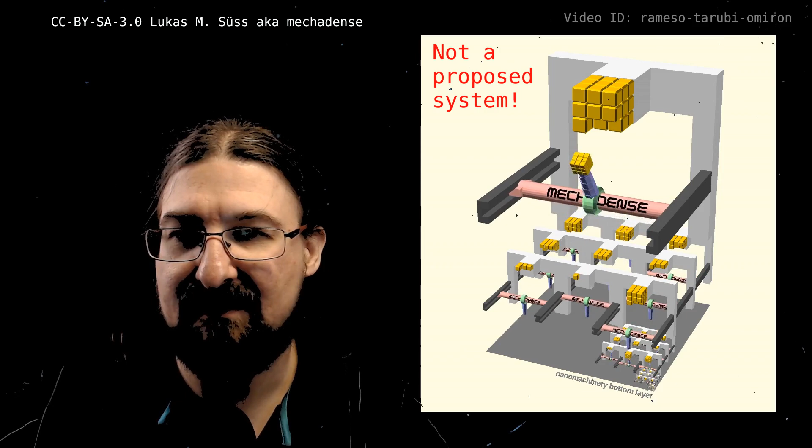Hello and welcome. I'm Lukas, and this is the start of a series about atomically precise manufacturing.

Preview. What I'll show you here is that when you make machinery smaller, it will get more productive, why that is, and what that means for macroscale style machinery at the nanoscale.

First, we need to talk about scaling laws. When we scale down macroscale style machinery to the nanoscale, we have to check in how far this hurts performance or even feasibility of this idea. But don't forget, it also could benefit performance of this idea. This is a possibility too.

Perhaps the most famous scaling law of them all is that finer material has higher surface area. When we go from 1 unit of length to 1/2 unit of length, we go from 1 unit of area to 1/4 unit of area times 8.

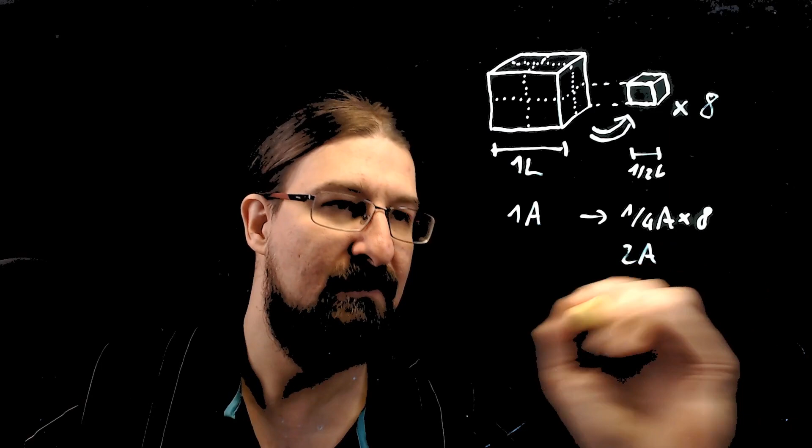As when we split the cube, we get 8 subcubes. And that means we get 2 times the area. That is, halving the size doubles the area. For 3 examples, this gives higher catalytic effect of finer powders, the adhesive effect of gecko feet, and the water repulsive effect of lotus leaves. But I won't talk about these because there's already plenty of resources out there about these effects.

Unfortunately, the scaling law that finer grained materials have higher surface area also means that smaller machinery has more internal bearing surface area per volume. That means higher waste heat. I will come back to that later.

There is a very special scaling law that's very much overlooked, and it's about what happens when you make machinery smaller. That is, when you make machinery smaller, you get, for the same total volume of machinery, more productivity. You get more product per time out of that volume. And that has very, very profound consequences.

So let's look at why that is. Why do we get more product out of the same volume when we make machinery smaller? So we see here we have a stack of machinery that successively gets smaller. We have a top production cell, next layer with small machinery, next layer with even smaller machinery, only part is shown, and so on and so forth.

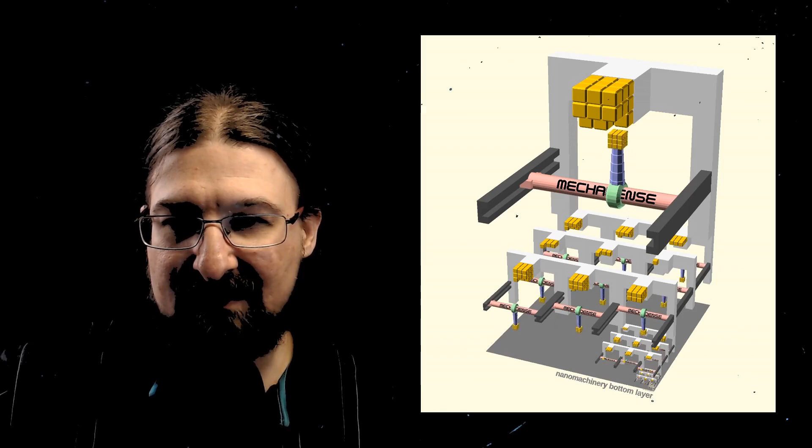As you can see, there's continuity, so there's no point in the whole stack where there needs to be temporary storage. So all that goes in from the lower layer goes out in the upper without any congestions. So the throughput at every layer is exactly the same.

But if you look closely, the layers get successively thinner. They get thinner and thinner, but they all have the same throughput. That means that even the thinnest lowermost layer has exactly the same throughput as the uppermost really big cell.

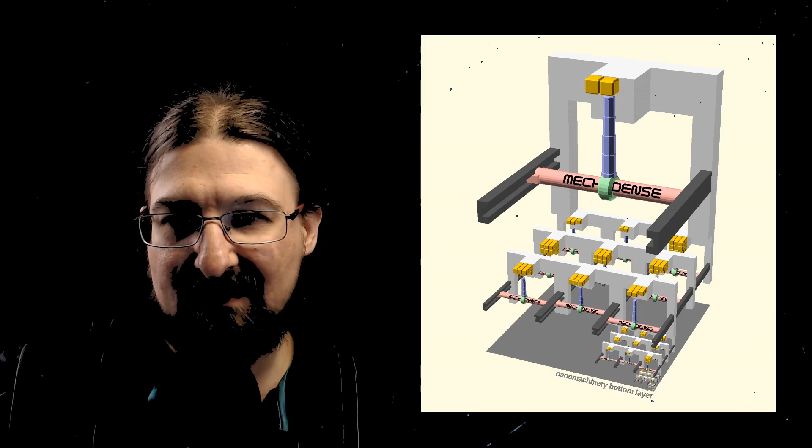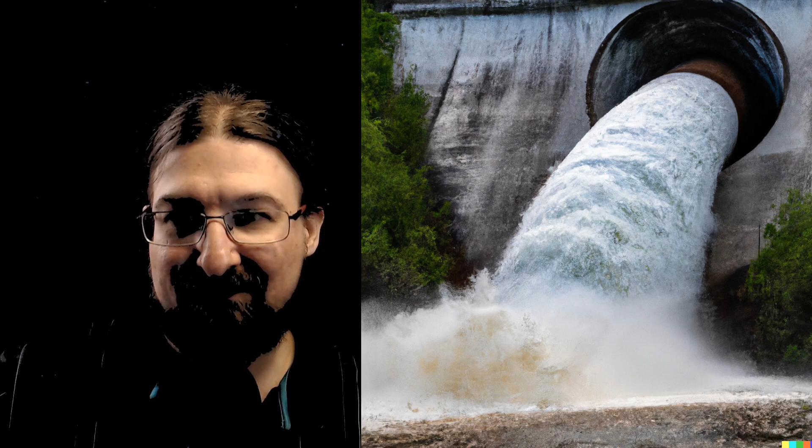And if you would fill the whole volume with the machinery of the lowermost layer, well, then you can imagine what happens. When I say filling up the whole volume with nanomachinery, then I mean this. The gray sheet alone would already provide very practical throughput, and filling up the whole volume...

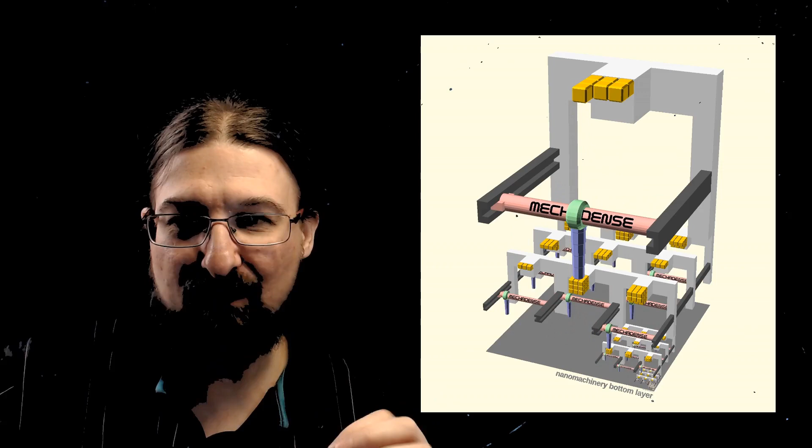Okay, there are some caveats to this. This scaling law only holds for the assembly. There's still the point that the product needs to be transported out of the system once it's finally assembled. And so you can exploit this scaling law only to some degree when the assembly motions are slower than your transport motions.

And that is the case if you have a more realistic system where not blocks are assembled with 3x3x3 size, but you assemble, say, blocks with 32x32x32, then the assembly motions are way slower than the transport motions, and you actually can exploit that scaling law quite a bit.

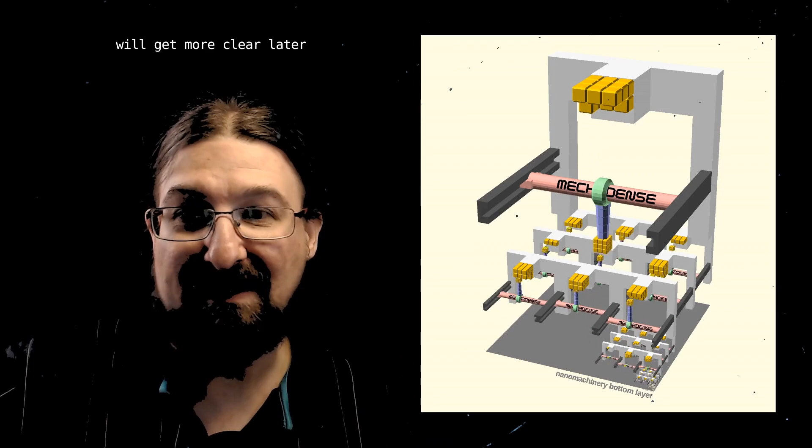Okay, technical detail. In a little more realistic system, where the layers have a stack of equally sized sublayers, blue, you also need transport channels for feeding in the input parts and feeding out the finally assembled parts, product parts.

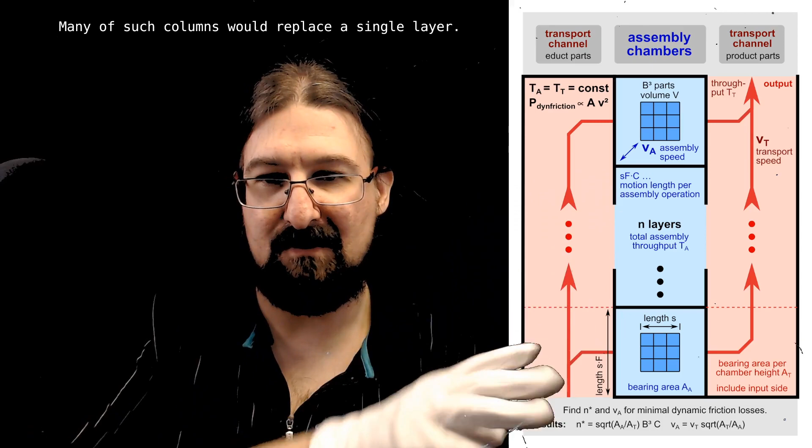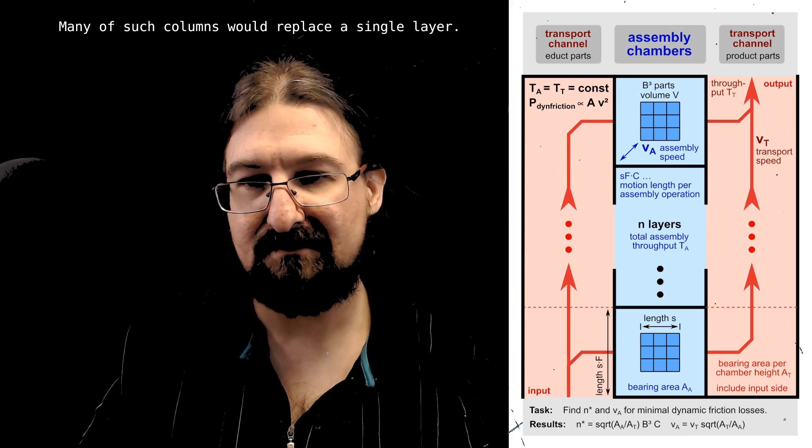Thus you have high transport speeds and slow assembly speeds. So you go one fast lane to many slow lanes to one fast lane. So you have the difference in transport motions and assembly motions.

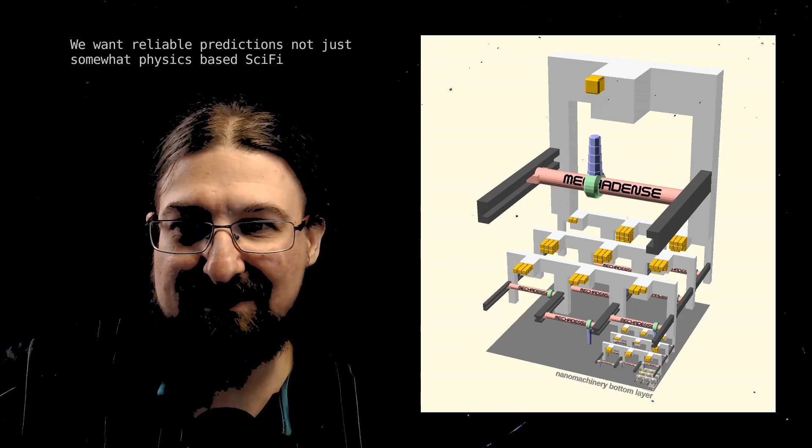So why does this matter? What is this relevant for? Do we really want to fill a huge volume of the smallest machinery? Well, that would lead to exorbitant productivity and exorbitant waste heat. We don't want that. A better approach is to turn it around and look at it the other way around.

So we have the huge advantage that for practical levels of productivity, we only need a very, very, very thin layer of nanomachinery. And in that very thin layer, there is only a reasonable amount of bearing surface area that causes friction. And also this thin layer is very easy to cool.

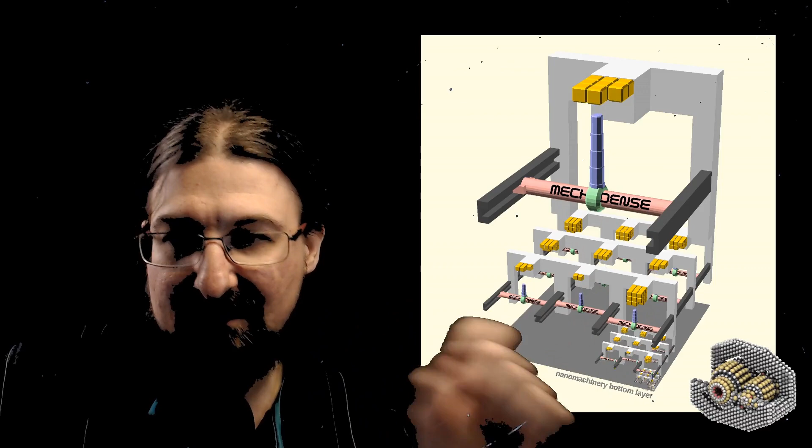As I already mentioned, smaller things have higher surface area. This also holds for the nanoscale machinery at the lowermost layer here. But since we only have a very, very thin layer, there's very little volume. So the little volume with the lots of surface area per volume compensates, and we have reasonable levels of friction.

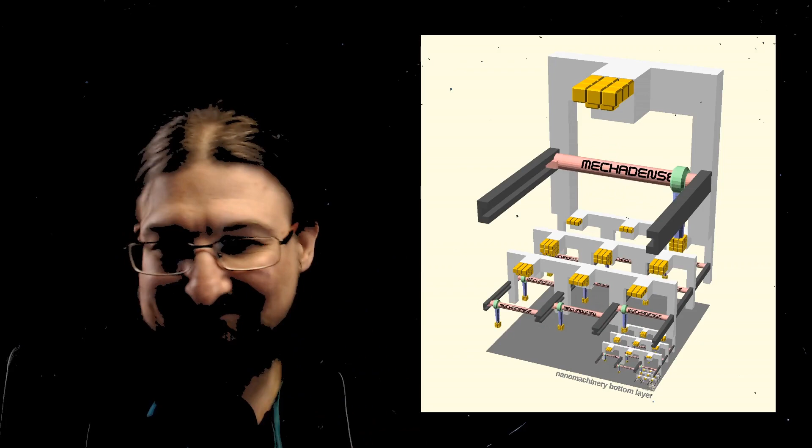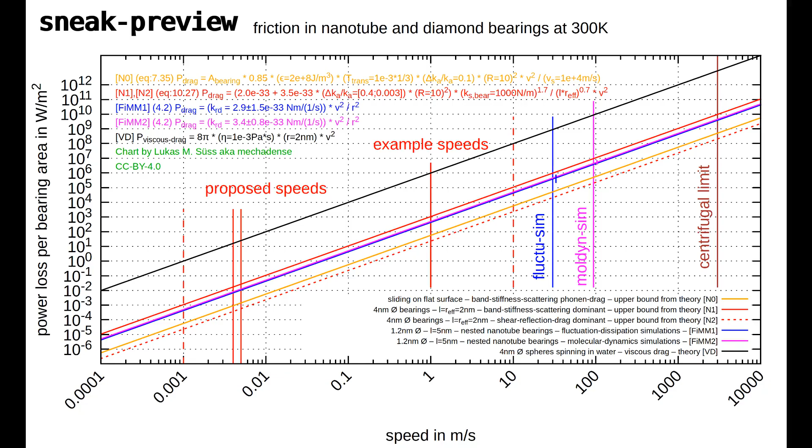If you want to know about quantitative numbers for friction, I took a look, and so far it looks good. I will eventually go into more detail in future videos. Regarding macroscale style machinery at the nanoscale, this scaling law debunks the argument that this won't work because of exorbitant friction. There are a lot of other arguments that I still need to cover.

One thing I want to make very, very clear is that this concept here is not a proposed system. Absolutely not a proposed system. This is just for the sake of illustrating this scaling law. An actual system would exploit that scaling law, and there are a lot of details to this, which I'll omit here.

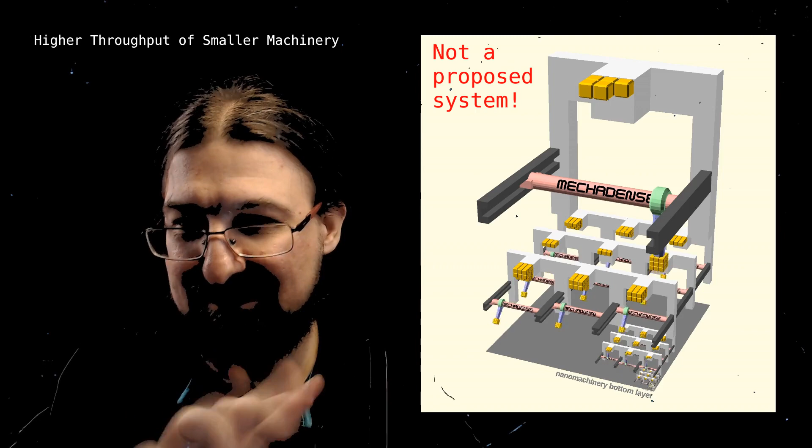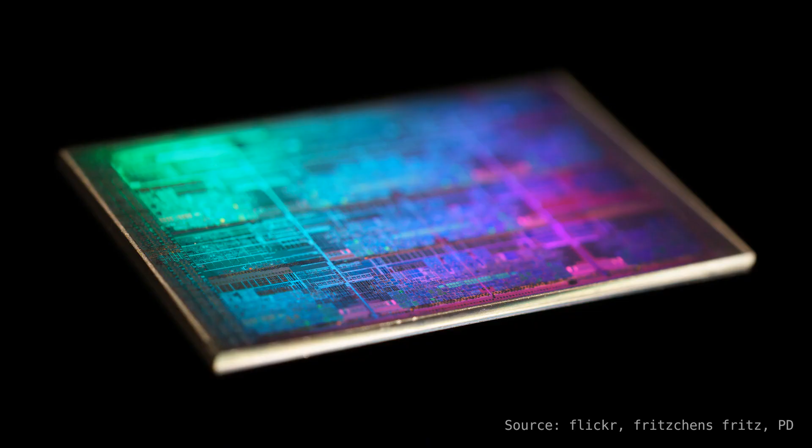The scaling law is also the reason why we don't want a soup of free-floating molecular assemblers, but instead a very thin layer of nanomachinery fixed onto a chip, just like outlined in the book Nanosystems. When it comes to an actually proposed system, there are quite some differences.

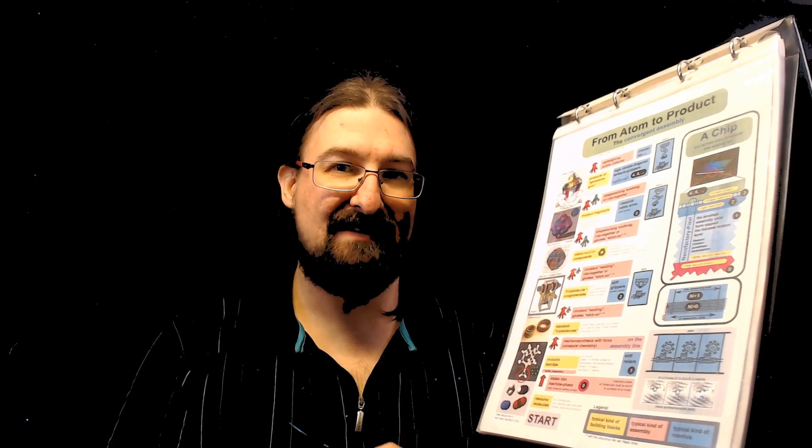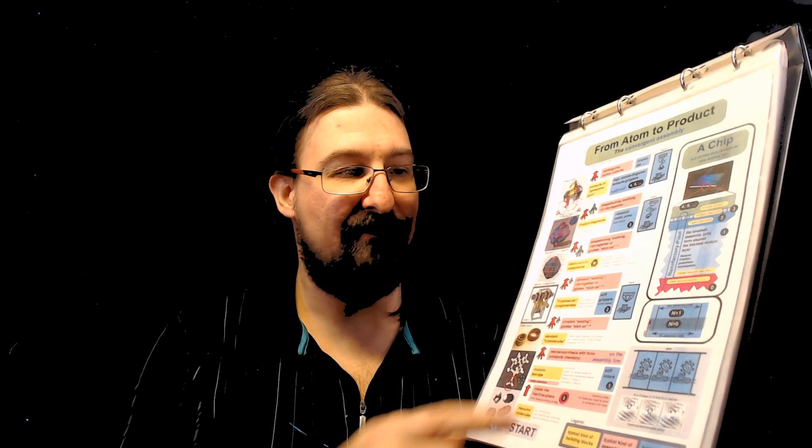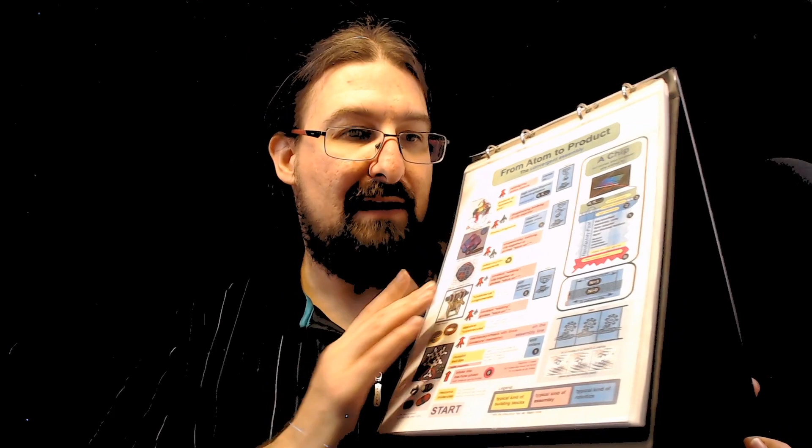Instead of having just single layers, we have layers with stack sizes of different thicknesses. We have robotics vastly differing in character across scales here in blue. We have different connection mechanisms across scales and different nature of part types across different scales in yellow. I may cover all of this in future videos in more detail.

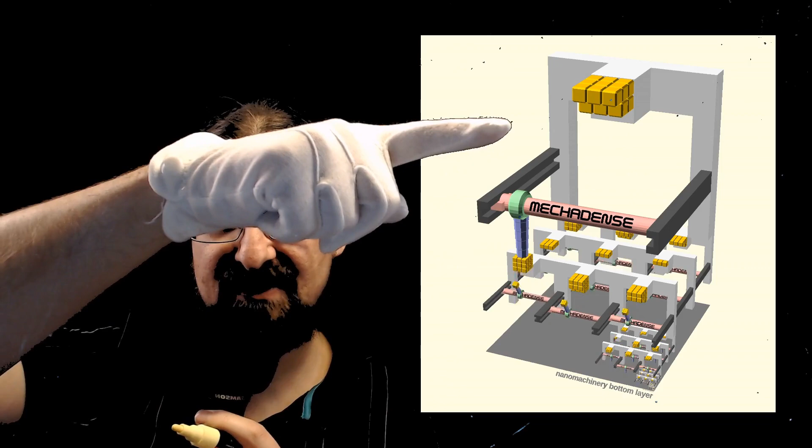Let's briefly look at the math of the problem. When we go from the uppermost layer, which is here just a single cell, to the lower layers, next layer here, then we might be inclined to think that the speed increases, that these smaller robots move faster than the big one here. But that is actually not true. Actually, these move at exactly the same speed as this one here. Exactly the same distance per time.

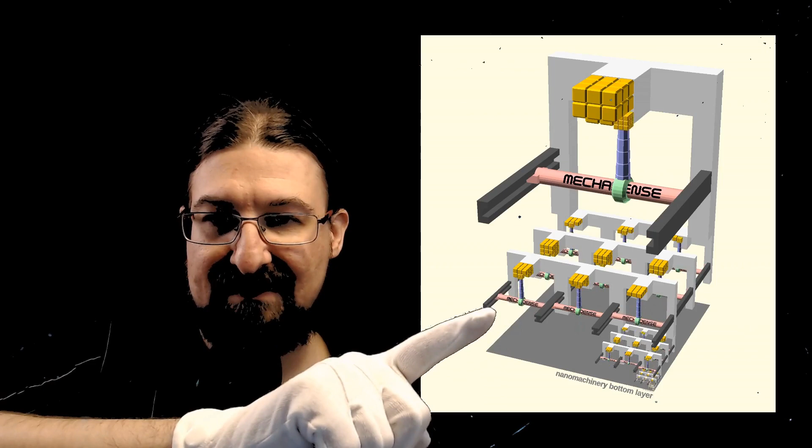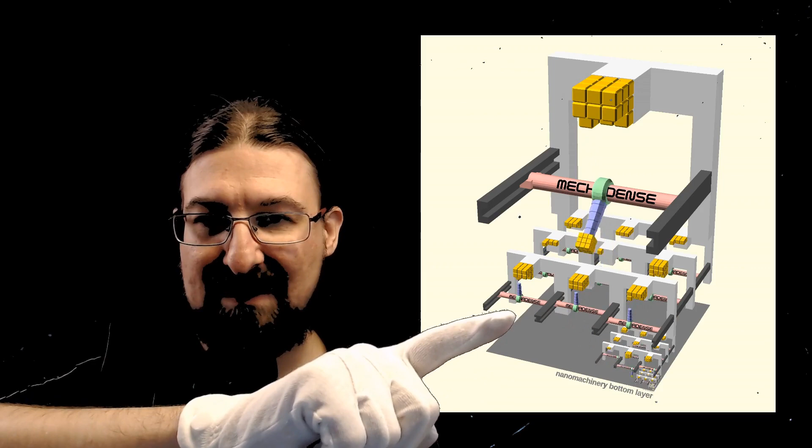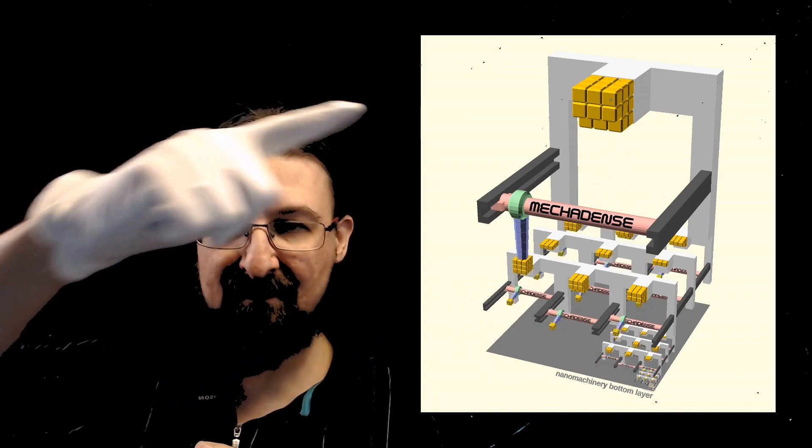What's different here is that the length needed to travel is just 1/3. So with the same speed, there are 3 times as many assembly operations per time. Thus, we have 3 times the frequency. So we go from upper layer 1 unit of frequency to next layer down 3 units of frequency. So we go from, say, F to 3 times F.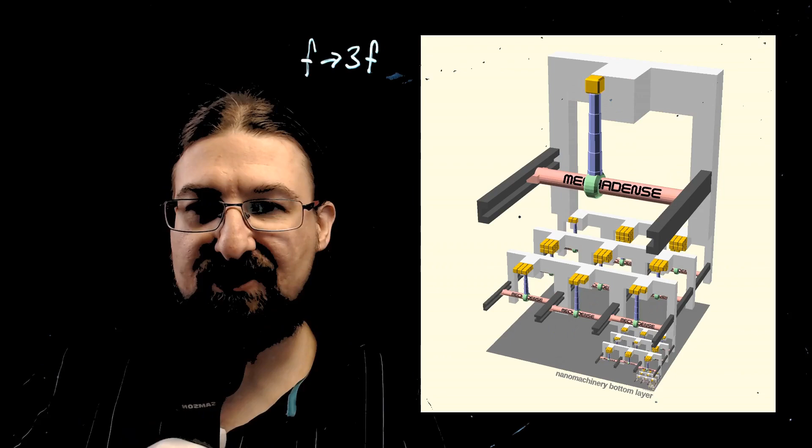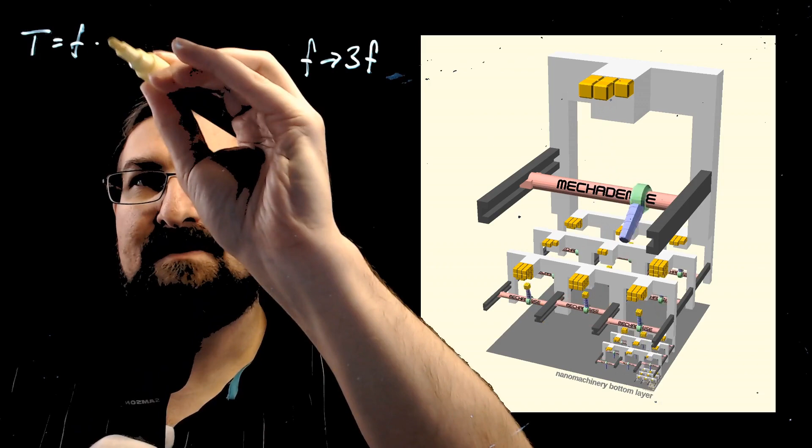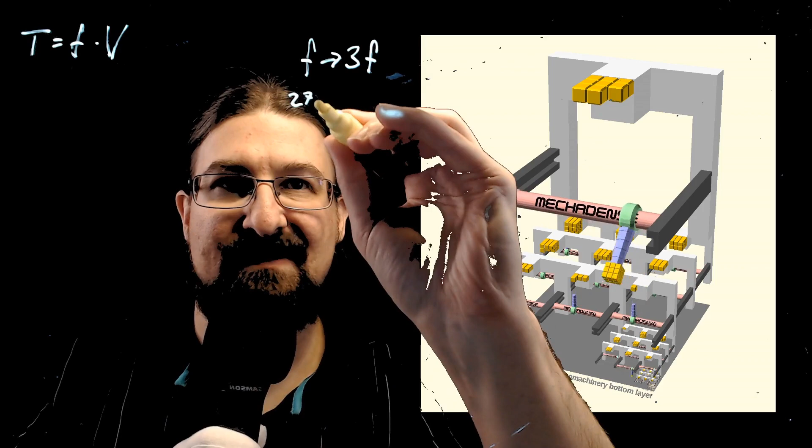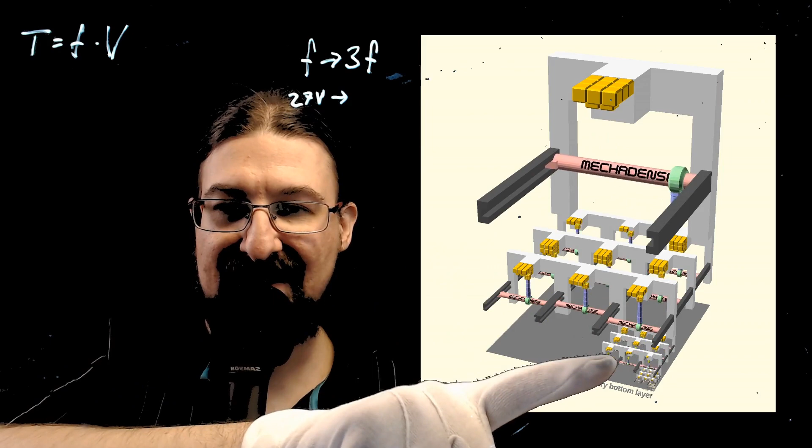So we want to show continuity of throughput, and throughput is equal to the frequency of operations times the volume that is placed per operation. So what happens with the volume? When we look here, what's placed are 3 times 3 times 3 blocks eventually. So we go from 27 times volume to, let's look at the next layer, we have 3 times 3 blocks here. The further subdivision is from the next layer, so don't let that confuse you. So we have 3 times 3 makes 9 times a unit of volume.

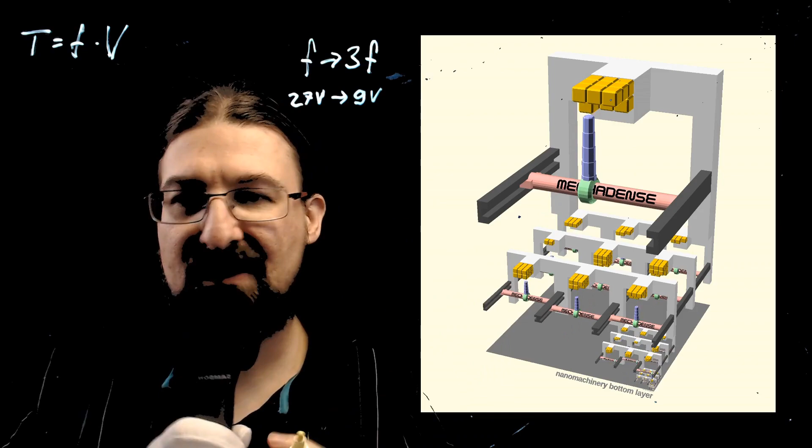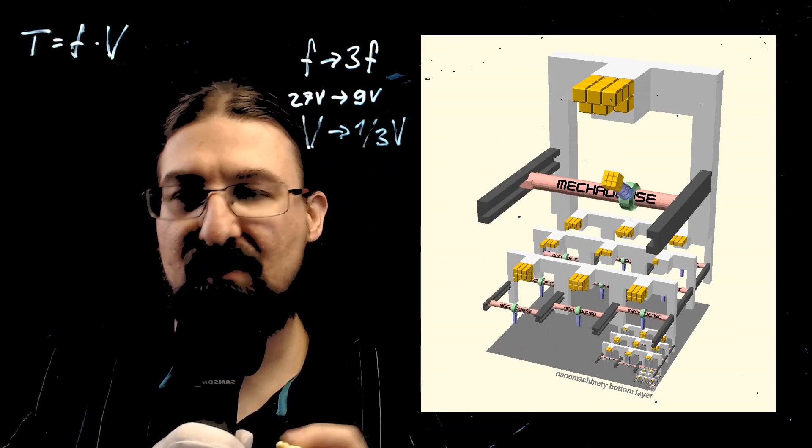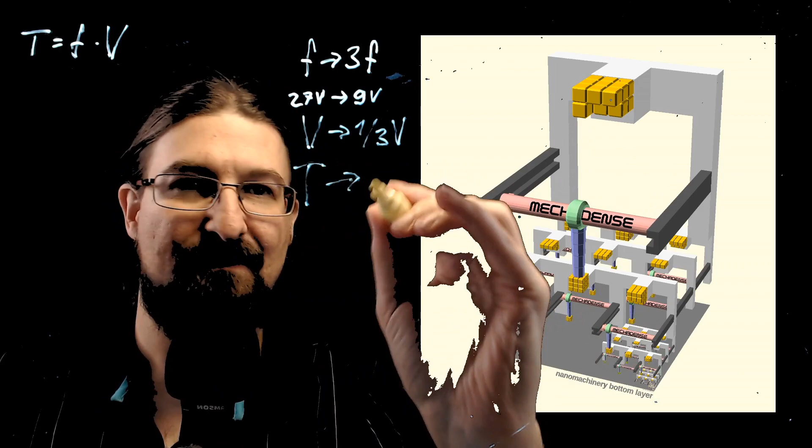So now we divide by 27. We go from 1 unit of volume to 1/3 unit of volume. And when we put it together, we get, if the pen still survives, the same amount of throughput, since 3 times the frequency times 1/3 the volume, same throughput. And that's what we wanted to show.

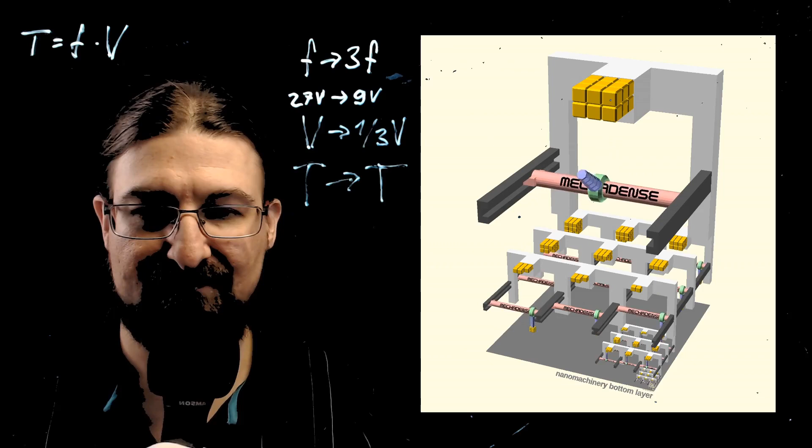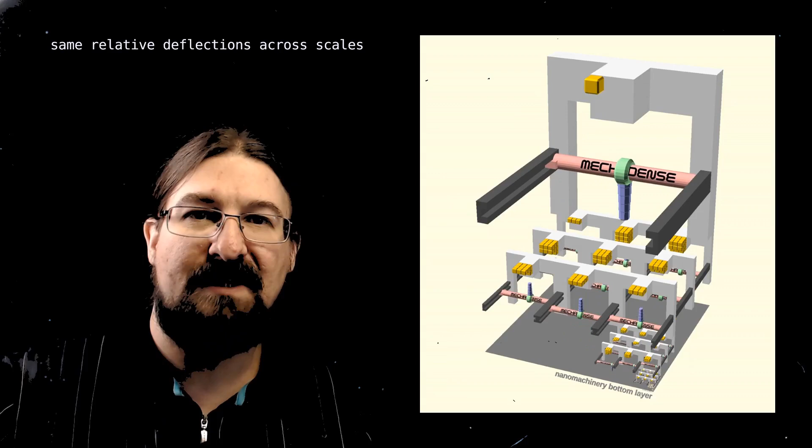You may still ask, why do we stick with the same speed when we go down to smaller machinery? Isn't that arbitrary? No, there's another important scaling law motivating that, which I'll cover in a future video. Still, for an actual system, we want to slow down a bit when going down the convergent assembly levels.

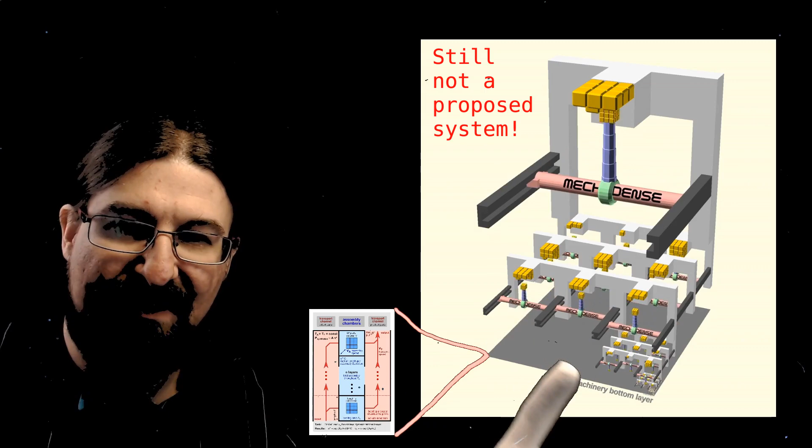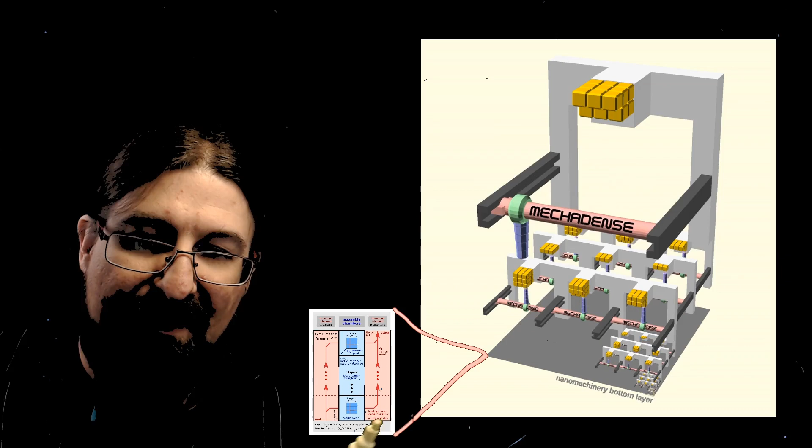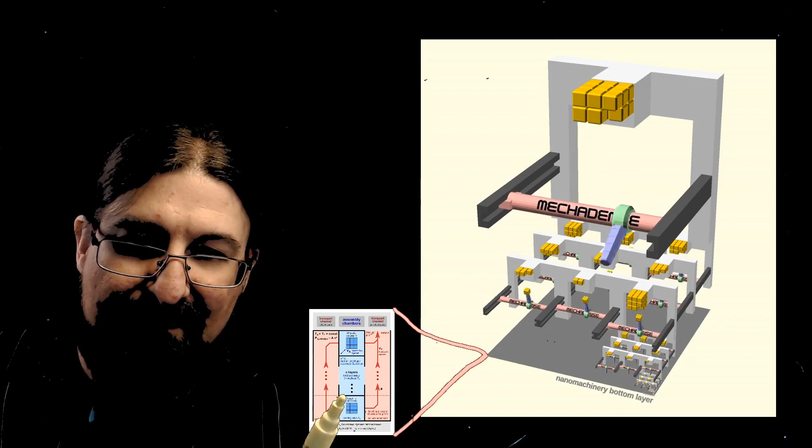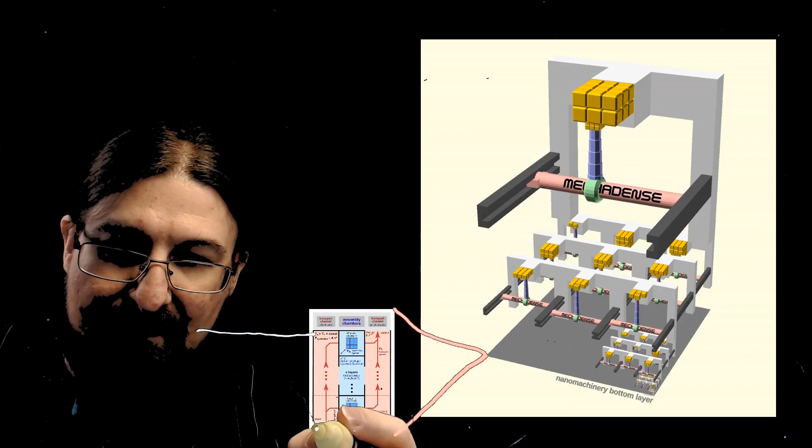Slower speeds of the smallest machinery, of course, means that we need more machinery in the lowest assembly levels. So for each assembly level, for each layer in this animation here, of the smallest layers, we need many sublayers. A single layer in the convergent assembly stack splits up into many of these columns with a stack of assembly cells, transport in, assembly, transport out, and many of these columns in parallel would make just a single layer in the convergent assembly stack.

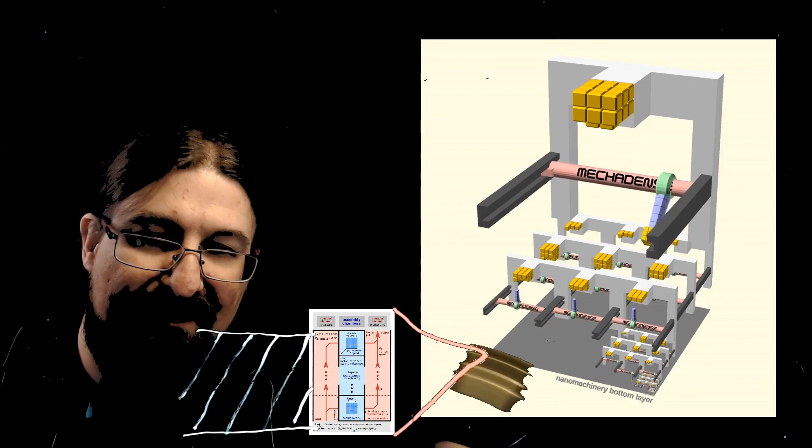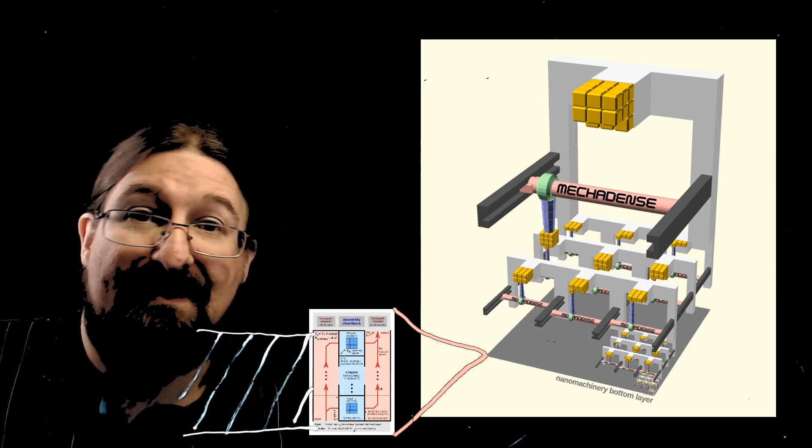The reduction in speed has twice as big an impact as the increase in the amount of nanomachinery. Thus, paradoxically, we get less friction from more nanomachinery. Going with the speed of the nanorobotics to 1/10 the speed, and going with the number of nanorobotics and the internal bearing surface area to

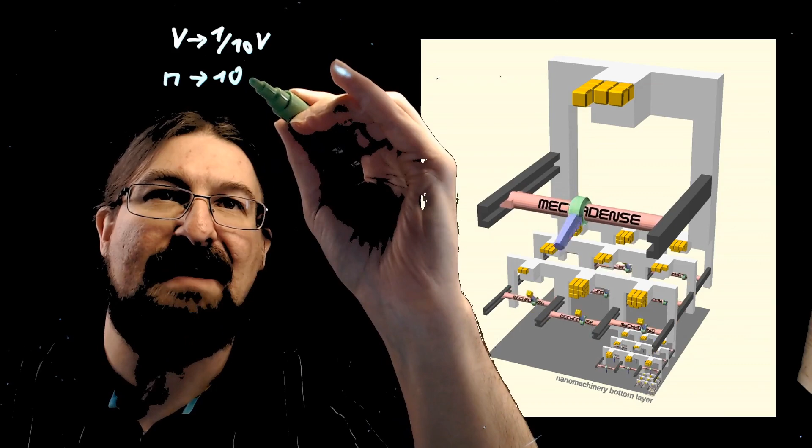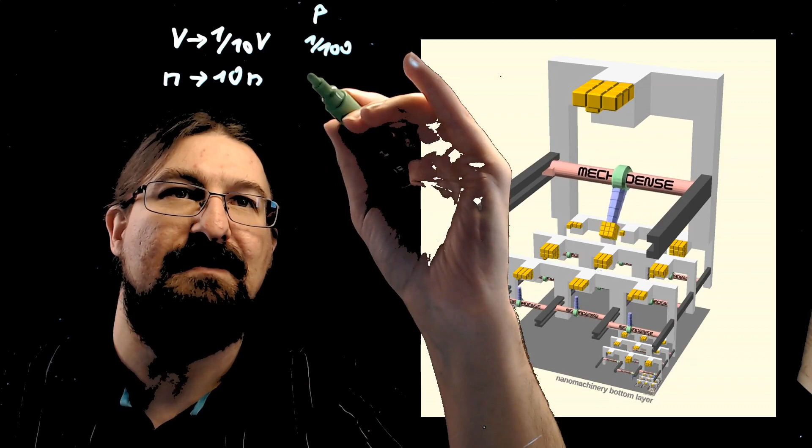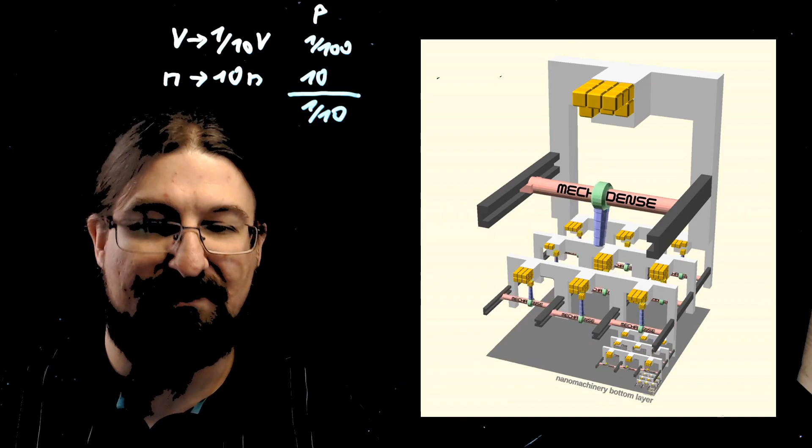10x the number of robotics, means in terms of power losses, we go from 1 unit of power to 1/100th unit of power, since this scales quadratically, and 10x the power losses from the increased machinery, and overall we get 1/10 of the power losses. Less friction. Note that we only can increase the amount of nanorobotics due to our all-important scaling law, higher throughput of smaller machinery. For an actual system, there's even more to discuss.

When we change the branching factor from 3 to 4, like in this example here, then we still have continuity of throughput. We still have what goes in, goes through, goes out, without any congestions. What does change is that we have lower throughput. The bigger the branching factor, the lower the throughput.

The number of parts to assemble, n, equals the branching factor to the power of 3. So when we go from a branching factor to 10x that branching factor, we go from the number of parts to 1000x that number of parts. Thus the major slowdown. But what we gain is more design freedom, because we don't have to plan in so many splits in the product's interfaces.

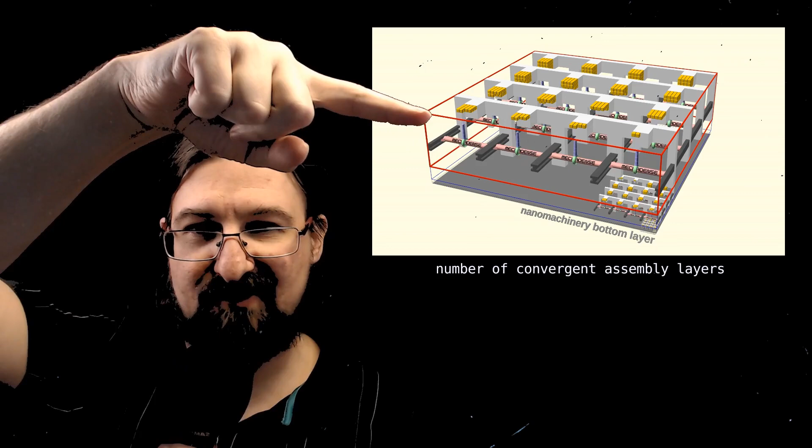What does not change the throughput is the number of layers. So as we could remove the red box layer or even the blue box layer, we could also add another next layer atop, and all this would not change the overall throughput. It would just change the initial lag time for initial production. So when the whole system is empty and the system starts up, there's a bigger lag time for more layers, but the throughput does not change.

It is entirely possible to cut off the uppermost layers of this convergent assembly stack. So we could remove the red layer or even the blue layer or any number of layers, as long as at least some basic nanoscale machinery layers remain. For a topmost layer, the difference is that instead of filling just a product volume inside the build chamber volume, basically the whole build chamber volume needs to be filled just atop. So it's like an extrusion of a solid compact product from below, and that just incurs a constant factor in reduced throughput.

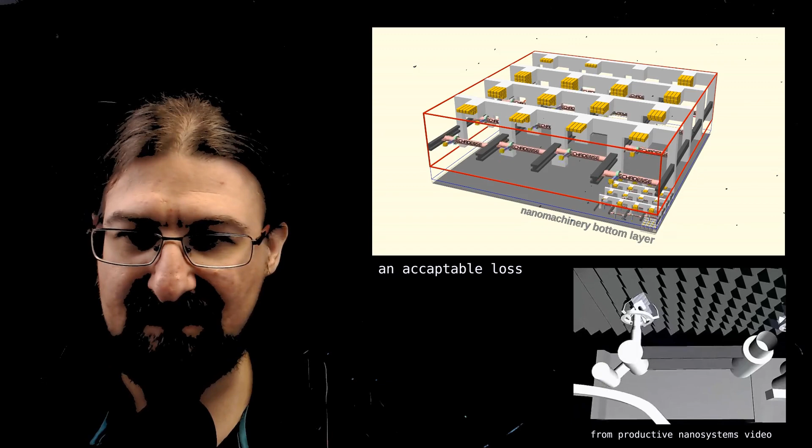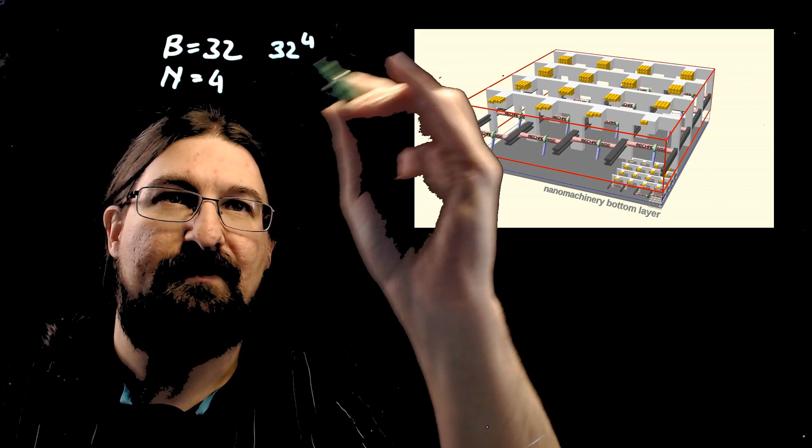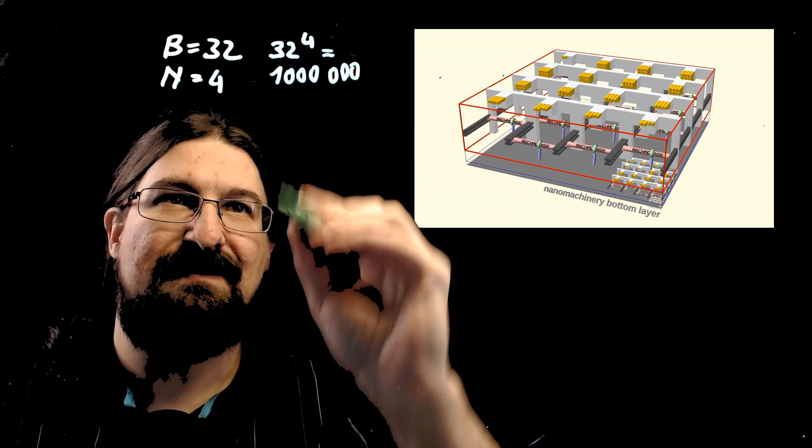So in a more realistic system, we would have a higher branching factor, not just 4 like in this example here, but say b equals 32 and a number of convergent assembly layers of n equals say 4. No more needed, since if we go across 4 layers we get 32 to the power of 4 across scales. So we go about 1 million times up in scale. It's just an approximate here. That means we go from nanometers all the way to millimeters.

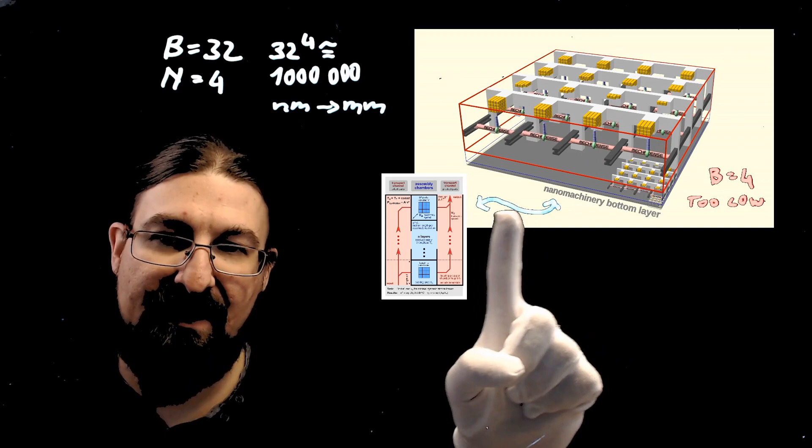Also, besides the modification of going with the branching factor to a higher number and going with the nanomachinery slower and compensating with more nanomachinery, there will also be a change of nature in the type of nanomachinery, as at the lowest levels there needs to be mill-style machinery due to very little available space. And at the topmost layer there's the option to go for streaming style assembly, because there's quite a lot of space available.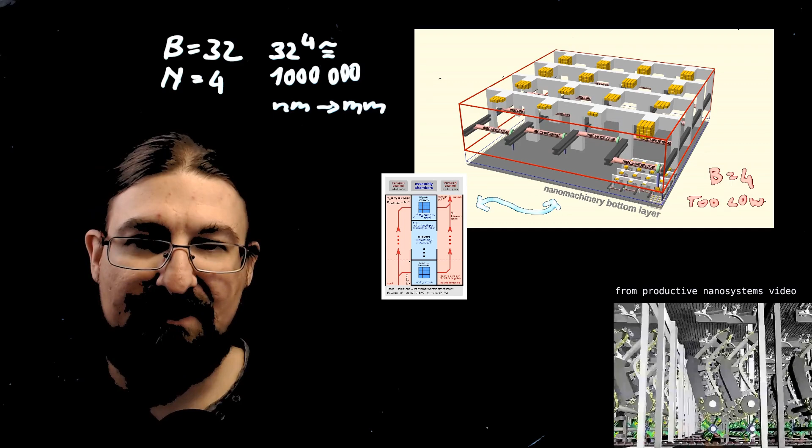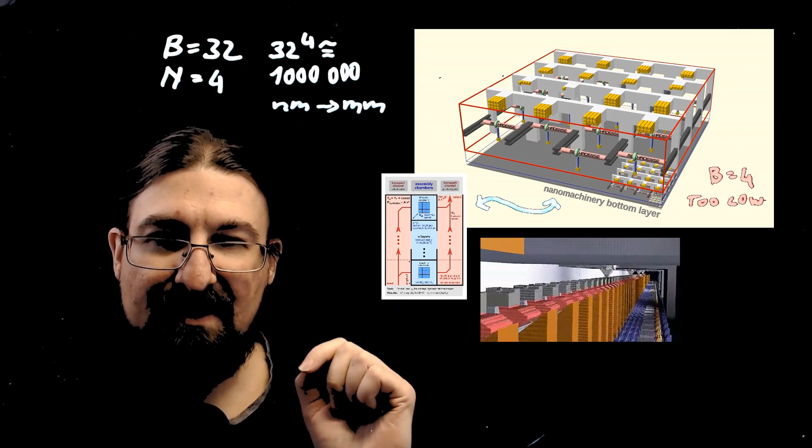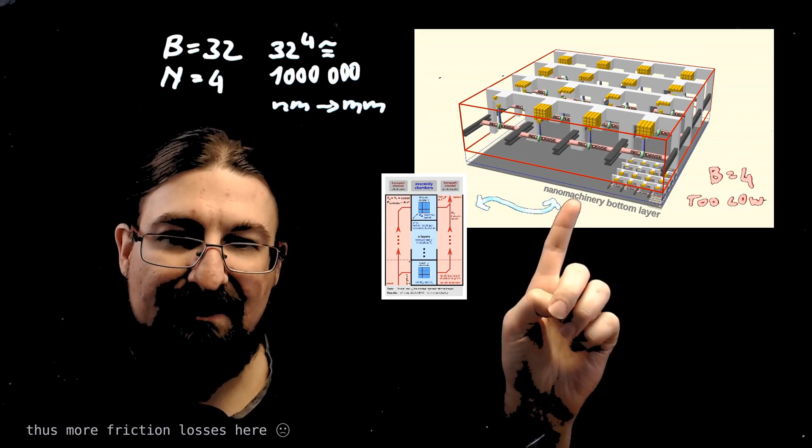I should mention that in mill-style assembly, transport motions and assembly motions are intermingled as one and the same. They are inseparable, and at every station there's just one assembly step done. So to assemble a block of b to the third, you need a number of b to the third assembly stations along the assembly line, and that makes quite a big long assembly line, meaning the very lowermost layers in the convergent assembly stack are actually quite thick.

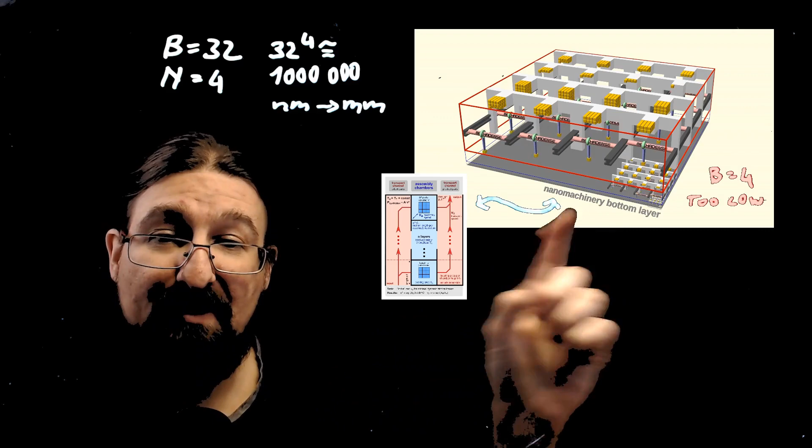With that, we somewhat have arrived at a point where we could say we're closing in on an actually proposed system. Huge omissions here, obviously. We haven't talked about a preceding resource preparation layer. We haven't talked about routing layers. We haven't talked about other subsystems. This is really, really scratching the very, very uppermost tip of the iceberg.

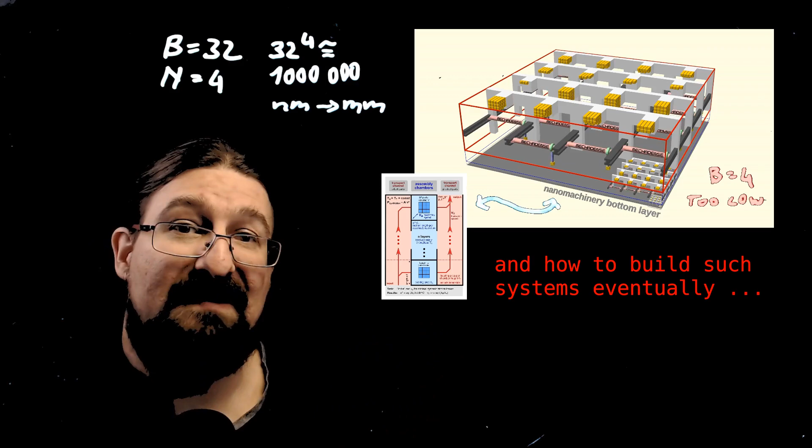To bring this to a somewhat funny closure, there are many possible form factors these devices could take. One of them could be good old smartphone form factor, and the advantage of course is they're thin, easily carryable, and if you need the uppermost assembly levels, such a box with a real big robot inside, you could dynamically spawn the uppermost robotics, and you wouldn't do normal robotics that you would expect when you hear robotics. Rather, you could do really cool stuff, really delicate, finger-like, very dexterous things. Yes.